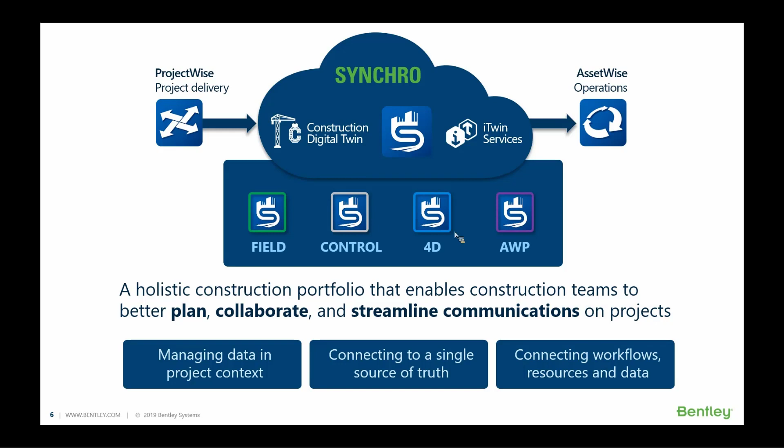Today's purpose is to focus on a specific component of the Synchro suite. That component we're going to be focusing on is Synchro 4D and the Synchro 4D solution as part of the Synchro suite.

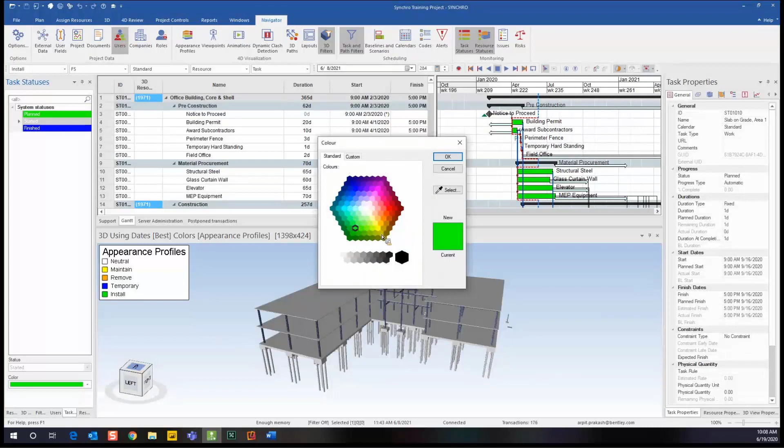As you can see here, we have plan, started, and finished. Looking at the Gantt chart, everything is green. The issue is that planned and start are the same color, so we don't really know which one is which - not a big issue. We can simply click on the one we want to change and update the color. We'll say anything that is started, we'll make yellow. As we can see, that didn't change anything because we have no started tasks - everything's still green, in the plan phase.

So with that said, we can actually create other task statuses if we like. Simply right click in your task status screen, and as you can see, it comes up. Let's call this one, for sake of example, 'issues', and we'll put it as red. Okay, so now we have this new issue status.

You may want to use this if you're doing a review of the schedule. Let's say we see that these steps here have an issue. We can go to our task properties on the right hand side, go to our progress status, and change that to issue. Now we can see our statuses have been updated to issue, and we can continue on. That's just one example.

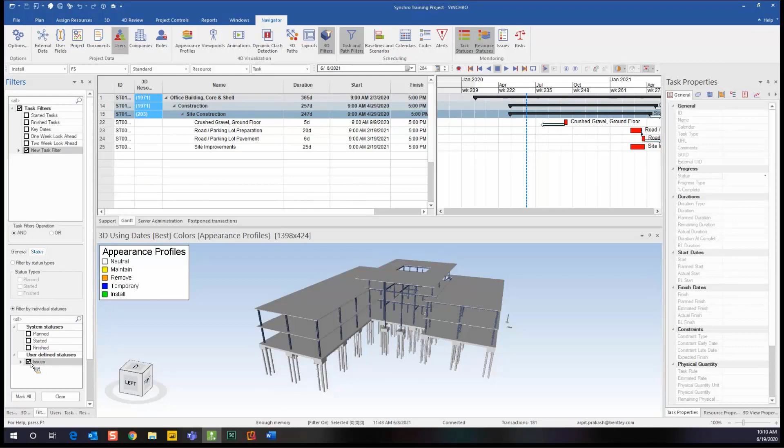We also can use our filters here. If we did a review of the whole schedule and marked everything with issues using our task statuses, we could create a filter, go to status, filter by individual statuses, and say we want to see everything that has an issue. We simply filter it out, and now we can come back to review and correct any issues or errors we need to update. Same goes for plan, start, and finished - right now we don't have any start or finish, so nothing will show up, only the planned. We'll turn this filter off and go back to tasks.

Let's give a couple of these - we got planned, let's change these to started. There we go. Now it gives options similar to P6 - we can choose a date, use our data date, or plan start date. We'll use the plan start date for this, then it's going to ask again for start time. As we can see, we have these started, they're 0% complete now that I have my data date ahead as we go. So now let's say we have those started, let's have these piles here.

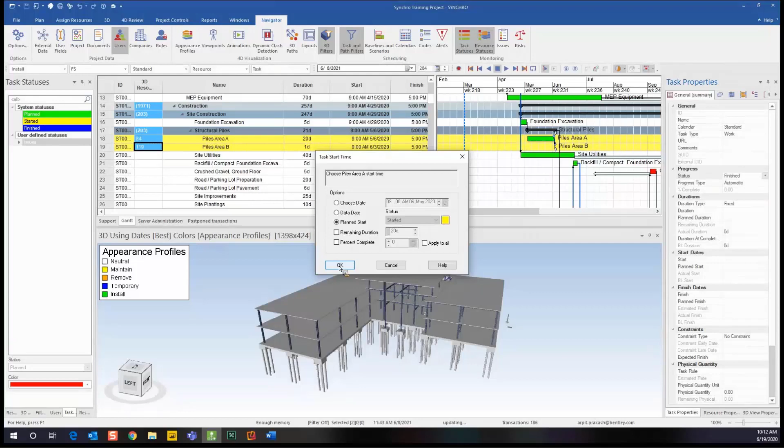Let's say that these tasks have been completed or finished. You simply go here and set it as finished. It's going to ask us to give a plan start date and finish date, and there we go.

As we look at our Gantt chart, visually we can see that these tasks are finished, and as we go up here we have these tasks marked as started. Again, if we wanted to, we could filter out our different tasks using our filters. So I just want to show you the different uses of the task statuses and how we can visually represent them in our schedule here.

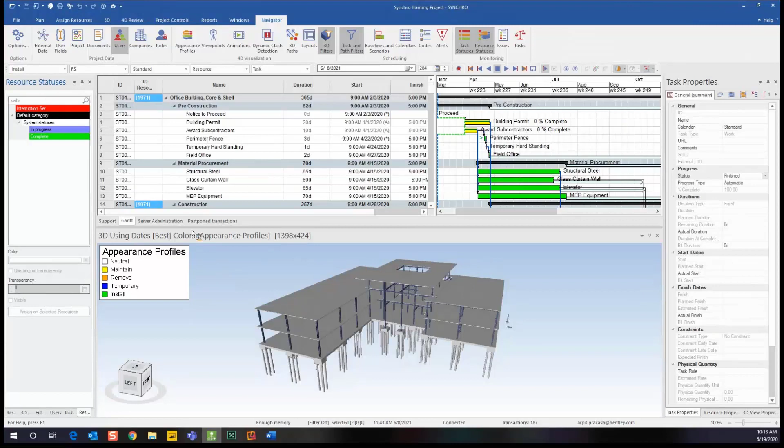So next we'll take a look at our resource statuses. As you can see, here are the system statuses that come with Synchro - in progress and complete. One thing we want to make sure of when using our resource statuses is that our color mode in 3D is set to resource, so now we'll be able to see these colors.

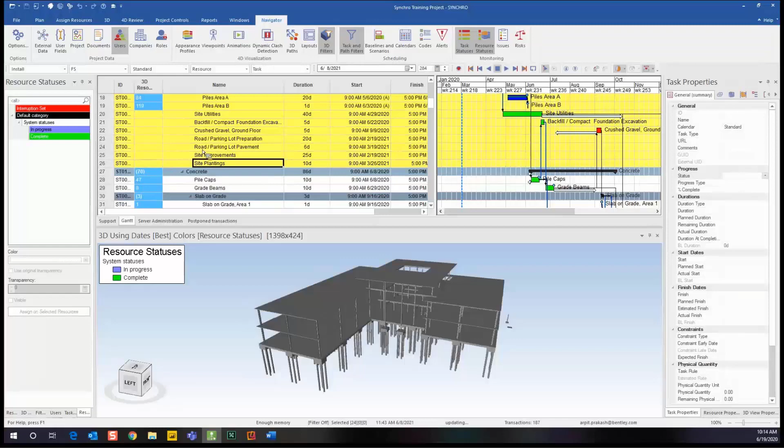So let's say we've updated our schedule and all these tasks have been completed. We'd simply select all the tasks that have been completed, then select assigned resources. Now we can see these are all the resources assigned to these tasks, and we want to show in our 3D view that this is complete.

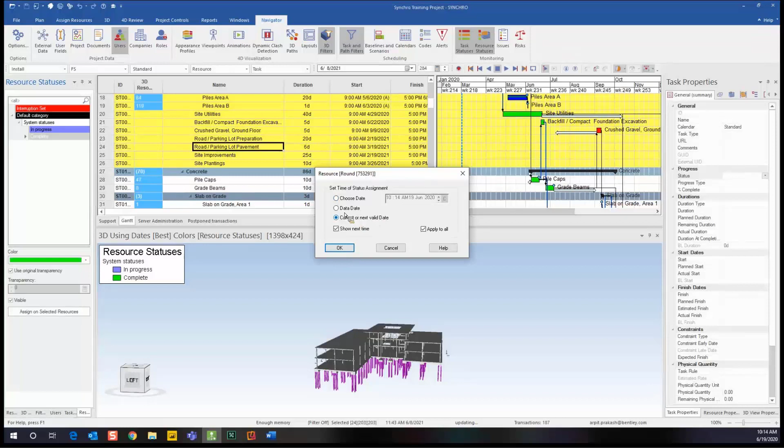So we simply select all the resources assigned to those tasks, and now we're going to assign. Again, we can choose a date for when these were completed, or choose our data date. For this example, we'll just use the current or next valid date. Now we can visually see that everything completed on our model here, all our piles, have been completed.

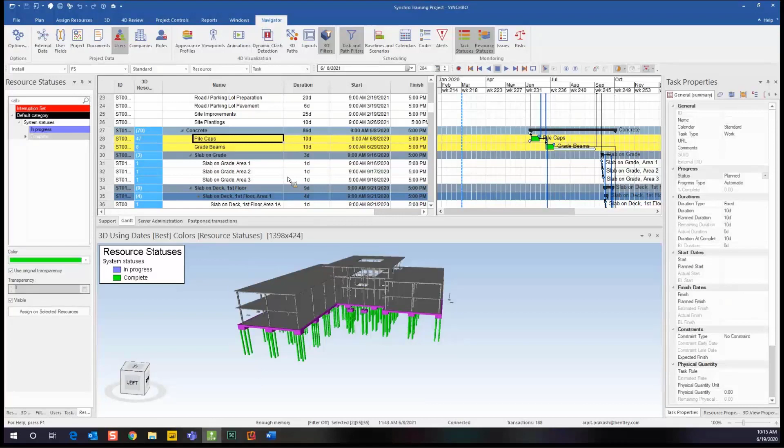Let's do the same here - I'm just going to show a different way of manually updating. So we'll say our pile caps and our grade beams are in progress. Again, we would select assigned resources for those two steps by right-clicking, and at the very top select assign resources. So you can see everything in purple - that's the resources assigned to these two tasks.

So another option we have here is if we click our resource properties and go over to our status summary tab, you can see there's nothing assigned to it yet. So what we want to do is go to the system status we want to assign, right-click, and then select assign status on selected resources. Now you can see these resources have this default category and the status set from system statuses.

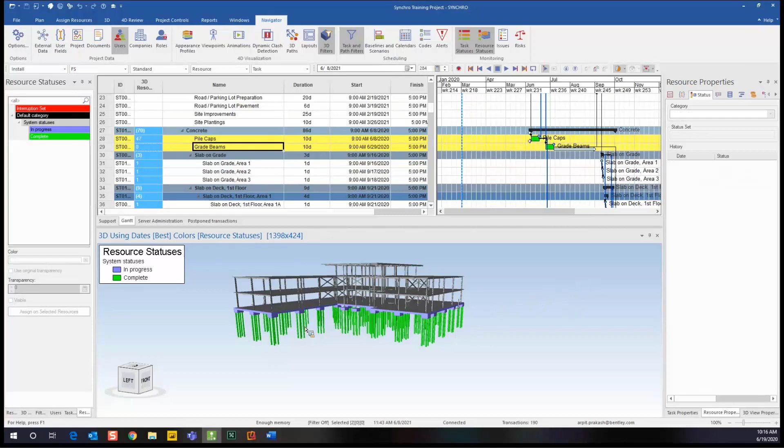So now if we wanted to update that to the in progress status, we'd simply hit add, and it's going to give us the in progress status for these resources. If I hit escape, now we can see that all our pile caps and what was selected for grade beams have this bluish purple color showing they're in progress, while our piles have a green color showing they are complete.

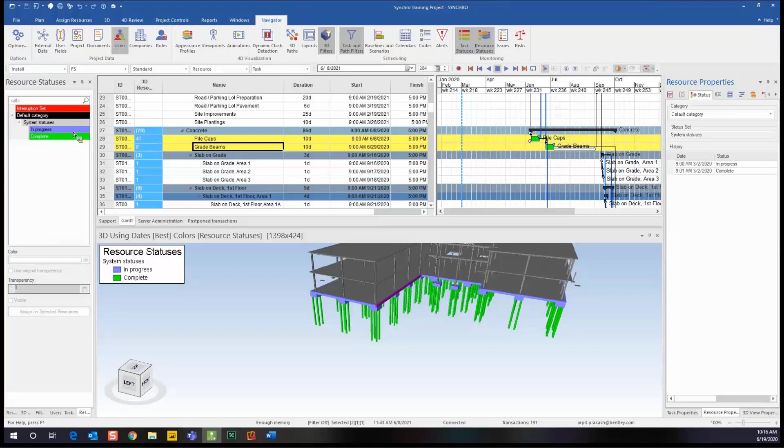So with that said, if I went to add again, it's going to show as complete now. As you add each status, it's going to move to the next status - so if we had four or five statuses, it would go one to the next. If we hit escape, now we can see that status is green, and we can see what's being completed and what is in progress within our model here.

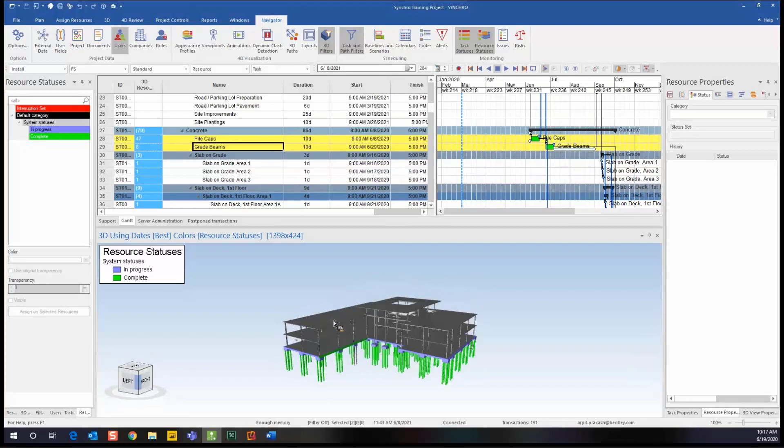So next, like I mentioned, there are a few different ways we can use our resource statuses. The next one we'll look at is using it for a material tracking application, and for that we'll use our steel. I've already created a steel 3D filter, so I'll activate that filter, and now you can see here it's all the steel for our project.

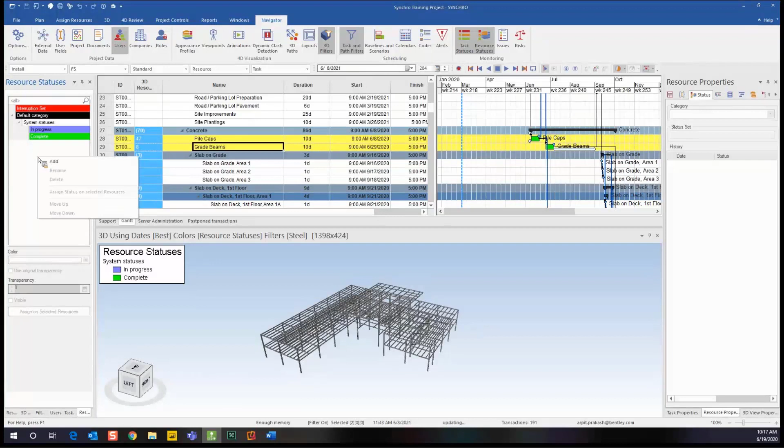So next we're going to want to create some material tracking statuses. Just like the task statuses, with the resource statuses you would right-click in the resource status box there, go add, and we'll just call this procurement.

Now we want to create some statuses for procurement of the steel. We'll select the steel because we want to give it its own statuses, and we'll add them. Let's create a status for anything that's not ordered, one for material that has been released, one for everything that has been shipped, one for everything that has been delivered, and lastly, one for everything that is going to be late.

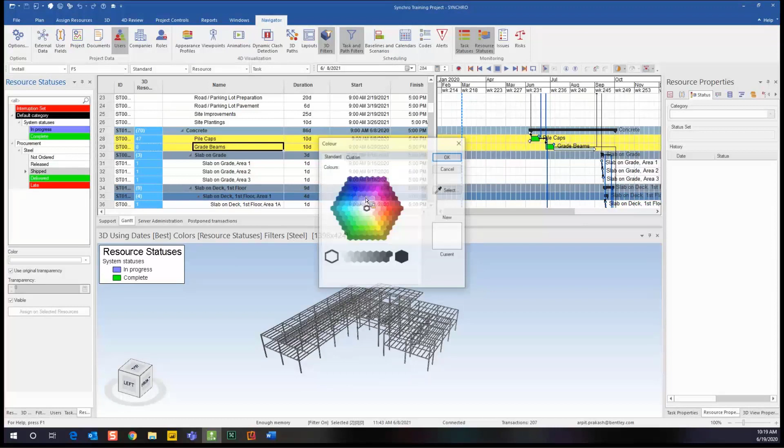So you can see here, all these statuses have no color assigned to them. You would simply click on the status and add a color by going down to the color option. So for late, I think we'll make that red. Delivered, let's give that a green color. Shipped, we'll give it a nice blue color. For released, we'll give that a yellow. And for not ordered, why don't we just give that a black color.

As you can see, we still have our resource status as in progress and complete, right? So now we've created a new procurement resource status, and we want to see the procurement resource status screen.

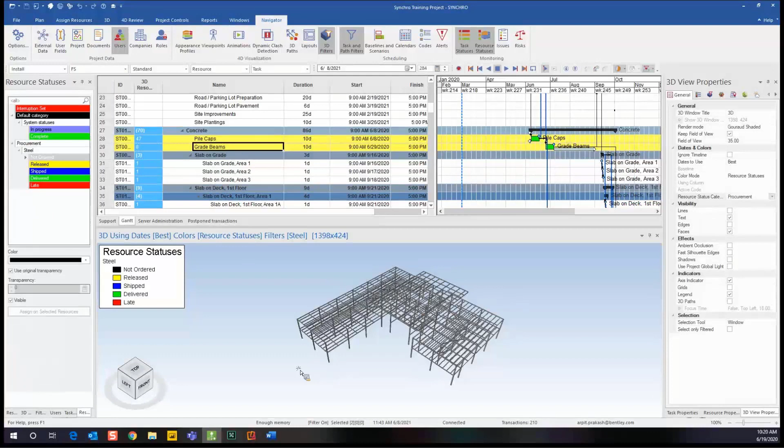So for that, we're going to go to our 3D view properties on the right hand side here. As you can see, our color mode is still resource statuses, but we want to change it to this new procurement that we've created. Once we change it to procurement, now we can see all our different statuses here. That's the nice thing with Synchro, you can create your different resource statuses and have different screens to view the different statuses they're in.

So now we're going to select all our resources here, and let's give everything, to start off, this not ordered status. We go to assign status, and again it's going to want us to tell the date that this status occurred. We'll just use the next available date there.

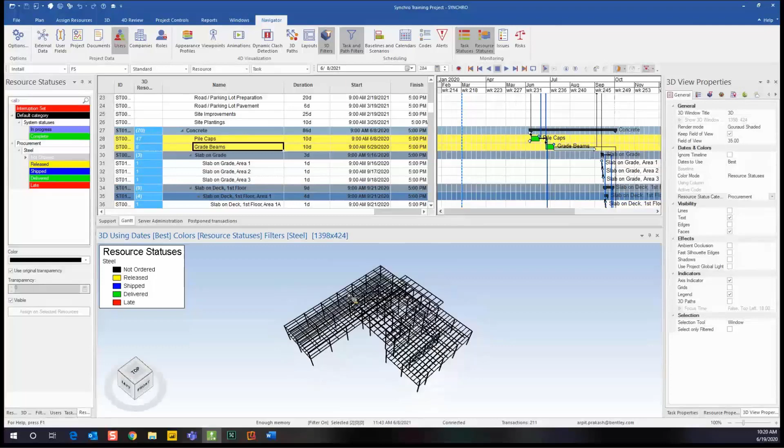So for the sake of example here, let's give this corner over here a status. Let's start with maybe late - we'll assign, again, next selected, so we'll make that red. We'll go over here and give this corner a delivered status, so you can see that.

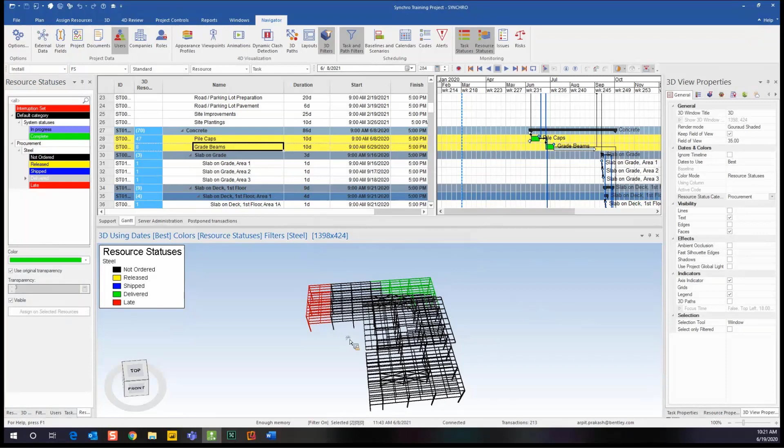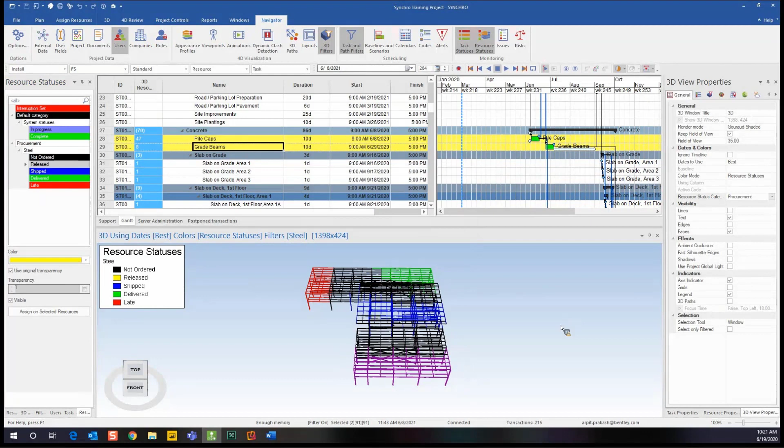Maybe we'll do one right down the middle here and give that a shipped status. And then what do we have left? We have released, right? So let's give this area here a release status. As we can see, it gives us a very nice visual of everything that's being delivered late that we know of, anything that's shipped, released, and then we can see all the materials that haven't been released yet, or haven't been ordered yet, sorry.

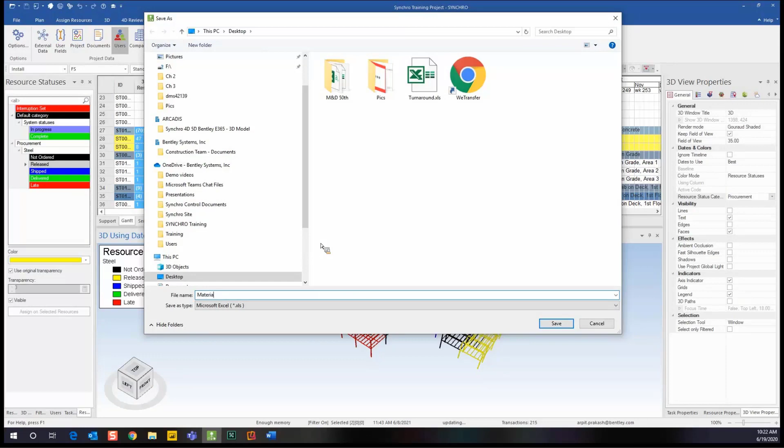So next, we want to take a look at how we can update these statuses using an Excel import or export, and then import back in. To do that, we simply go up to our file and export the data out using Microsoft Excel. We'll just call it materials, save, go next. So we have the option here when exporting the data to pick and choose what fields we want to export.

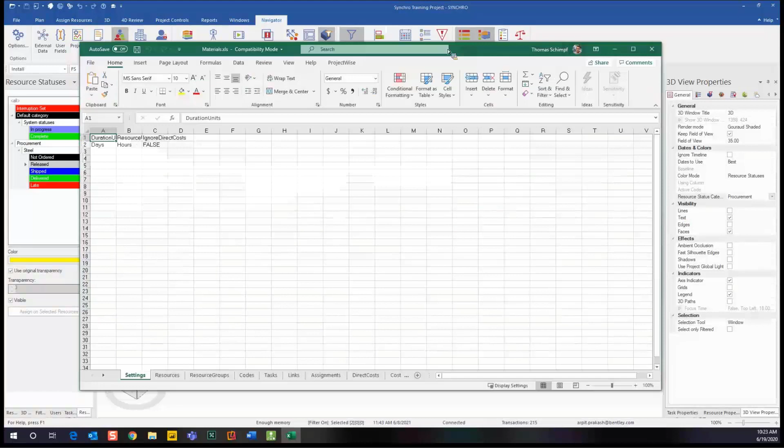For this example, I'm just going to use the default. As you can see here, we have our resources, resource statuses. I'll export everything just so you can see what the export looks like with a fully exported sheet here. We'll hit export, and now it's telling me it's finished. So let me open up this material spreadsheet. Now we can see we did our export, and we have all our different tabs here - settings, resources, resource groups, codes, tasks - whatever information is within Synchro, it's going to export that out to give us the ability to update those fields.

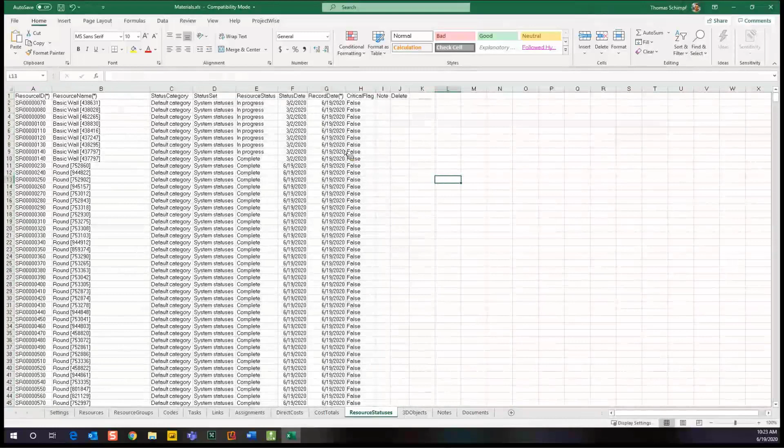So what we want to update today is our resource statuses. I'll just open this up a little bit and put a filter on it as well. So we can see the first status set that we created, the system statuses - we have all those, but right now we're not worried about that. We want to take a look at our steel and update those statuses there. As you can see, we have our procurement and all our steel with resource statuses here, not ordered, shipped. So based off the resource ID, it's letting us know what status is assigned to each.

So with this said, you can set this up with your project. If this is something you want to do, you probably want to set this up at the beginning so that whoever is keeping track of your materials has that common data in your tracking spreadsheets as in Synchro.

So I'm just going to sort this A to Z here. So we have all this stuff that's not ordered, right?

All right, so let's say everything has been released, right? So now we can order everything. So now what I'm going to do is just copy and paste that release status into the not ordered here.

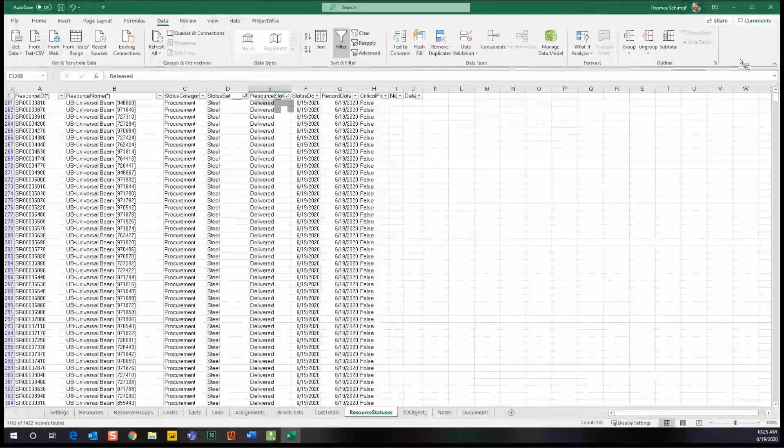So we'll save this. And now we'll come back to Synchro. So now what we want to do is import that information back into Synchro.

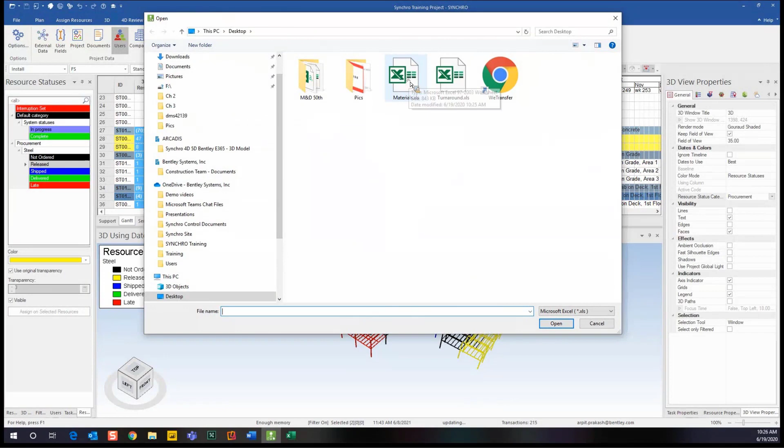So simply, we're going to go to our file, import. We want to import the Excel information. Here we have our materials list, right? Next, it's going to give us our option on what we want to do for each different object here. So we go down our resource statuses, we have integrate, so that's what we want. We'll leave that as that, and just leave it as the default settings for this example.

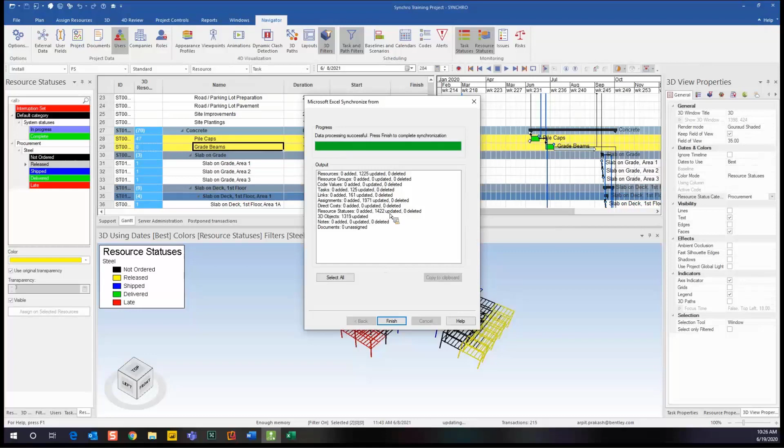So next we'll hit synchronize. Then it's going to give us a little recap of what's been changed. It's showing us our resources. 1,225 have been updated. When we look at our resource statuses, we can see 1,422 have been updated. So we're going to hit finish.

Now we can see everything that was not ordered has been changed to release, and it gives us a very nice visual of our materials. We can visually see what's going to be late, released, shipped, delivered, and it gives us a very nice visual of that within our 3D window here.

So next, we chatted about earlier is about creating some weighted statuses, and that's where we can create a status, assign it a percentage for completion, and that will reflect within our schedule, right? So again, to create a new status, we're just going to hit add.

We'll call this weighted status. It's going to bring it down to the bottom for us here. So now we want to add again.

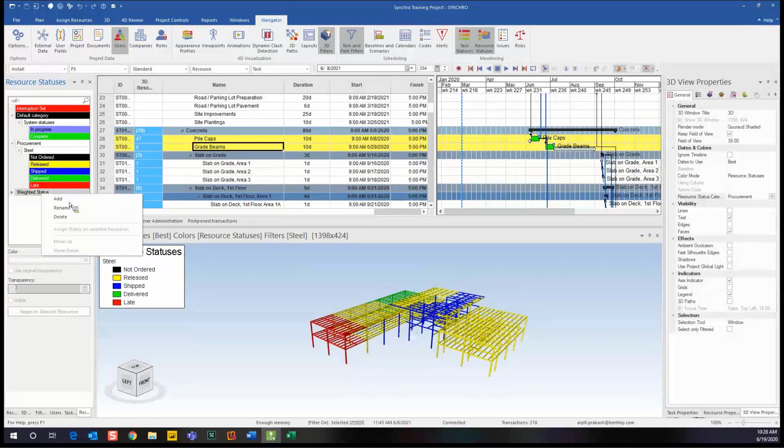For this, I want to do this with our concrete. So now I'm going to clear all my filters so that I can see everything. So now we can see, so now I just want my concrete, right? So if I scroll down, we can see here, we have all our concrete steps here.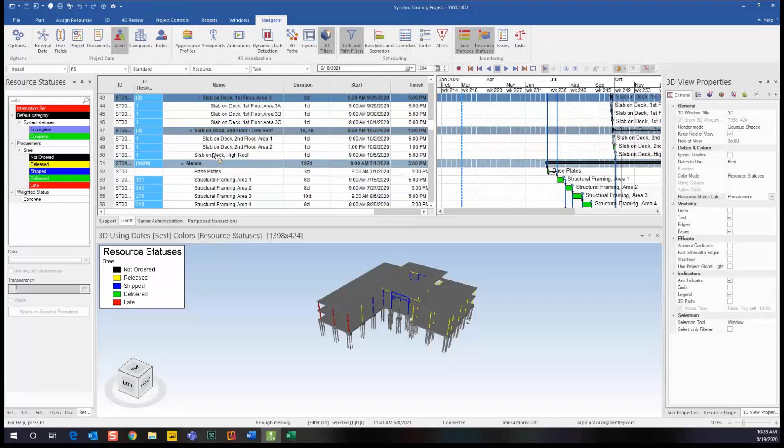So to get all my concrete resources, I'm just going to scroll to the bottom of our concrete steps, highlight all my steps here, right click, select assigned resources. Now we can see it has all my concrete resources selected.

Now I want to create a 3D filter, right? So to do that, I'm simply going to right click on the screen. I'm going to go up to filters, and then I'm just going to say create filter from selected. So now I'm going to call this concrete.

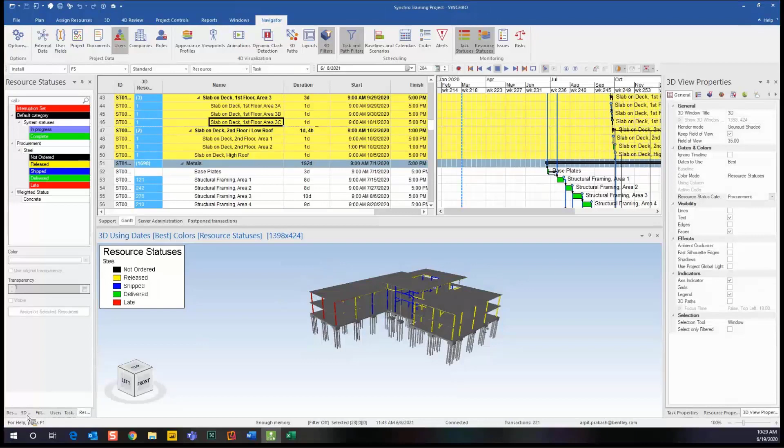So now as you can see, we go to our 3D filters, we have our concrete filter. So now I'm going to activate that in our 3D view. And now it's isolated just our concrete for this project, right?

So now let's go back to our resource statuses. So we have our concrete. So let's create a few different statuses for our concrete here. Let's say our first status we want is formed. And our next, we will create a reinforced. And then lastly, we'll add and we'll just say, let's call it poured.

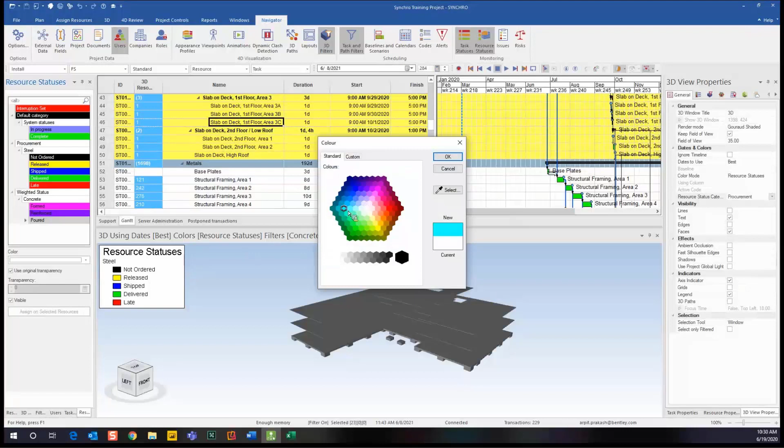So again, it's going to just default to having our statuses as a clear white status, your original color. So for the formed, let's give this a color, a bright pink here. And then for our reinforced, let's give it a different color we haven't used yet, maybe this purple. And then for our poured, we'll give it another color, let's try this blue. So now we can see here that we have our 3 different statuses with 3 different colors.

So again, what we want to see is the weighted statuses concrete resource status, right? If we look at the screen here, we're on resource statuses and we have it on procurement, right? So now we want to change that to the weighted status, right?

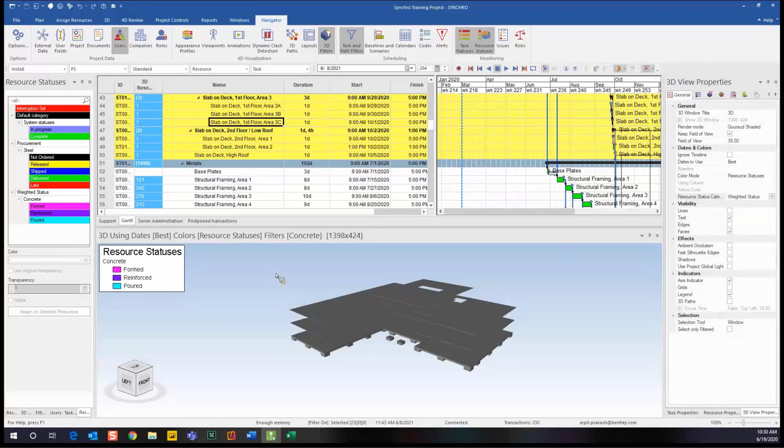So we haven't assigned anything, so obviously we're not going to see any of these colors. Before we do start assigning anything, we're going to jump over to our Project Controls tab here at the top, and then we want to go to Recalculate Task Progress.

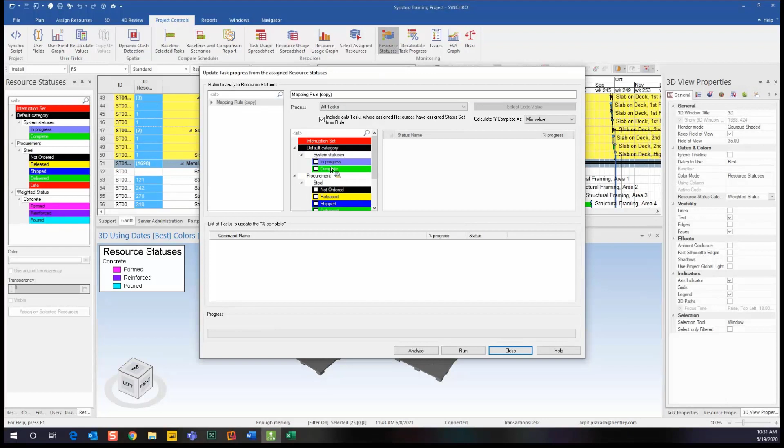From here, we want to create a new rule, so we're going to go into our rules to analyze resource statuses. We're going to hit Add, and it's going to give us all our resource statuses that we've created. We'll click off our three different concrete statuses here, and it's going to bring them up into our window. As you can see, we have formed, reinforced, and poured, and our progress percentage for each is 0.

So let's say for formed, if we assign a formed status, it'll give us a percentage complete within our task of 20%. For reinforced, let's say we want that as 60%. And as soon as it's poured, we'll give that 100%.

So now we have that complete, and we can close this out.

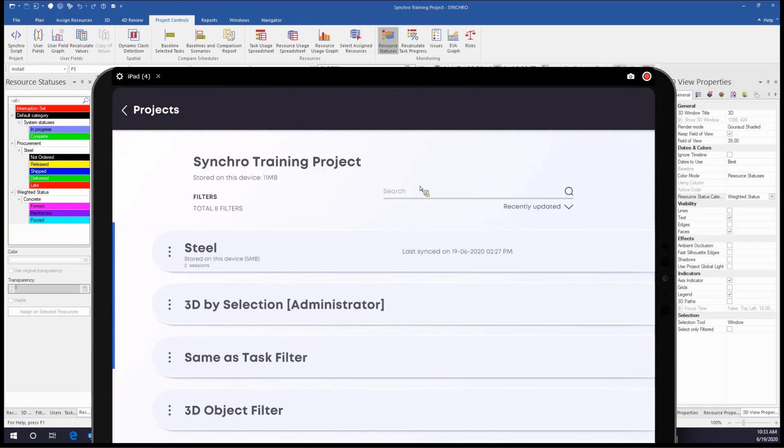So as we scroll down, we're going to have to pick our project here. As you can see, if we look at the top, it's our Synchro training project, so we're going to pick that. Once we open that, it's going to list all the 3D filters that we have. For this, we created our filter for concrete, so I'm going to hit concrete.

And now it's going to bring up all our concrete, and I can simply move the concrete around to the different view that I want to see.

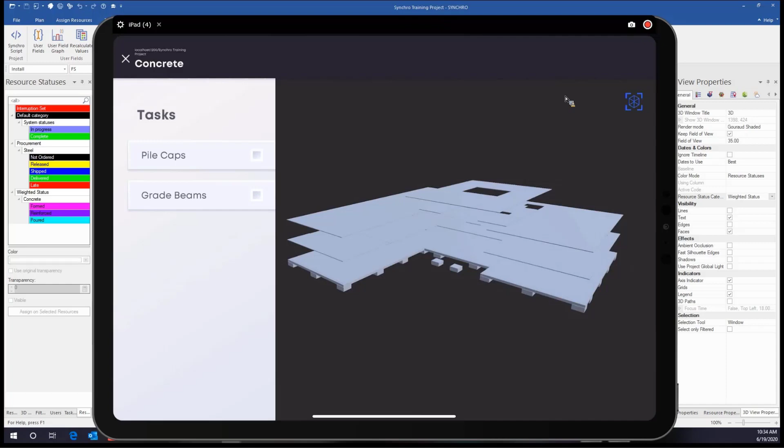One thing I forgot to do before I logged in is that we want to select all our resources here, and then we want to assign the concrete. So we're going to select all our resources, right-click on the concrete, and then assign the status on the selected resources.

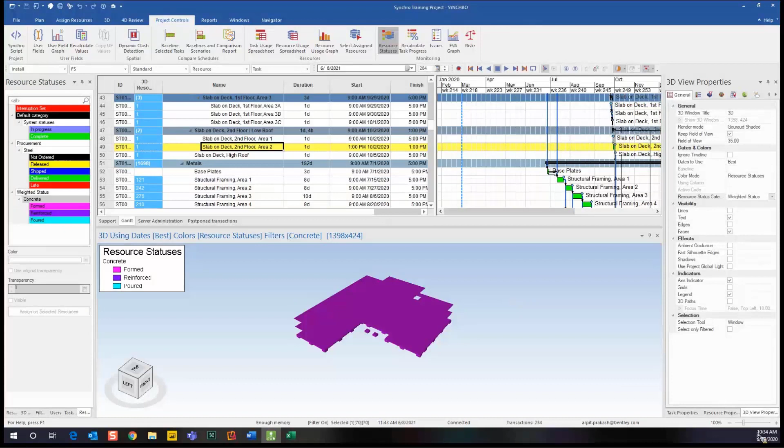So now if we go here, just to double check that we have it — now we can see under our Resource Properties and Status, we have our weighted status for concrete.

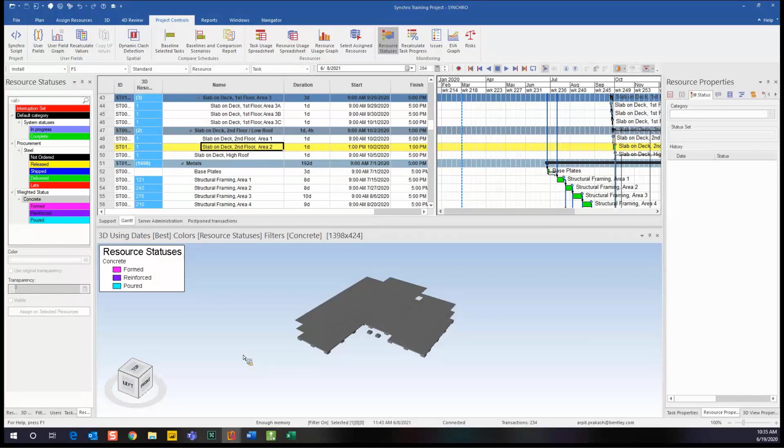So now if I jump back into the site here, jump back into site, go into our training project, go down to concrete. Now we're going to see all our concrete.

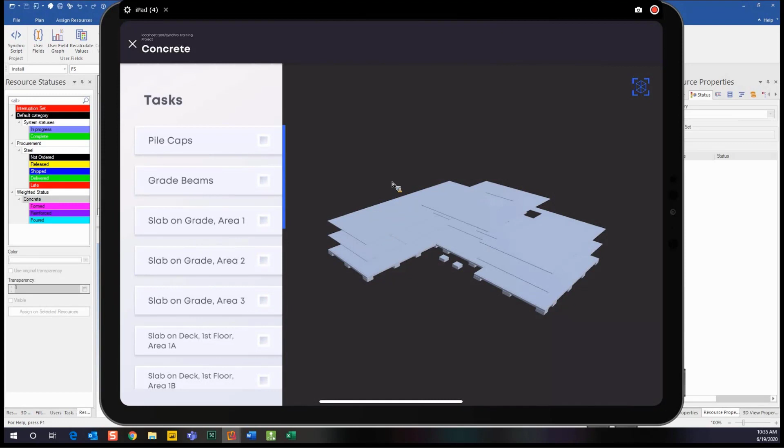All right, so let's start with our pile caps here. As you can see, it shows all our pile caps. It's actually showing us our system status because we do have a system status assigned to these pile caps. So if we wanted, we could actually update our system status from the site as well. Whatever status is assigned to these resources, it's going to show up on the Synchro Site app.

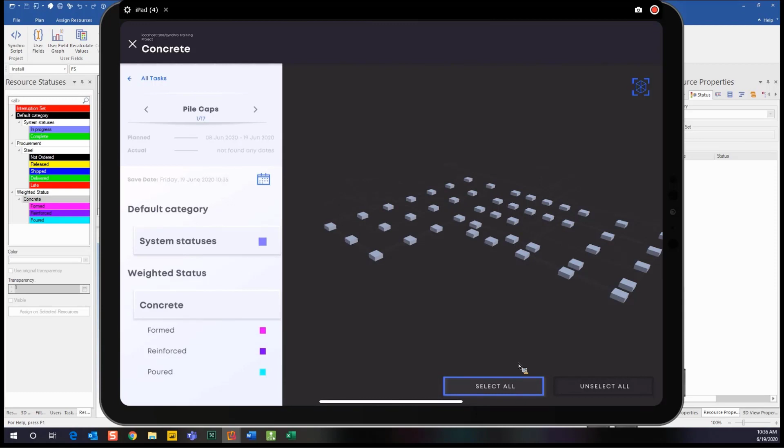But for today, we're going to take a look at our concrete. So for all our pile caps, I'm going to select all here. So now everything's selected, and I'm going to say that everything has been poured. So now we've updated that.

Let's go down to our grade beams. I'm going to select all, and we're going to say those are poured. I'll save that as well, and I can simply hit this Next button to go to the next resource. We can see I'm at 3 of 17.

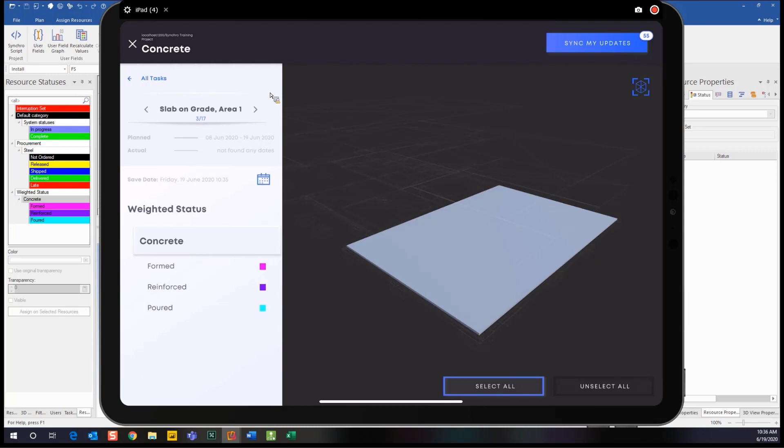So for this slab on grade, let's say all our slab on grade is poured. I'm going to hit Next. I can simply click on the screen here, click on the resource that I want, hit poured, saved. Let's go to our next one, saved. And then it's going to bring us to our first floor.

So let's say our first floor, everything on our first floor is reinforced. So again, I'm simply clicking Next, clicking on the actual resource, then clicking on the status I want to give it, hitting Save, onto the next.

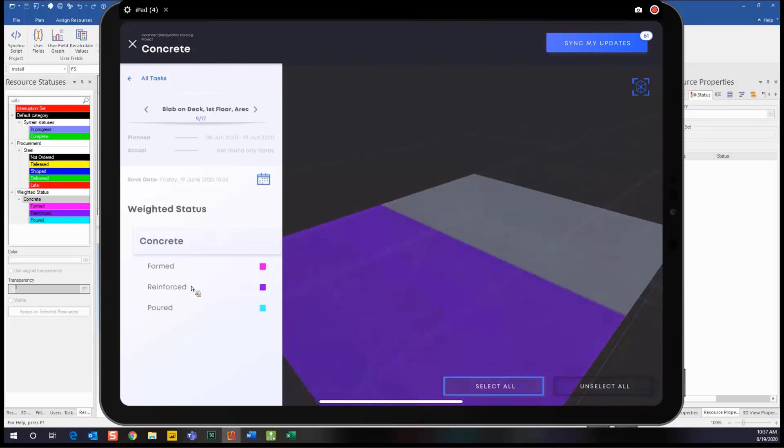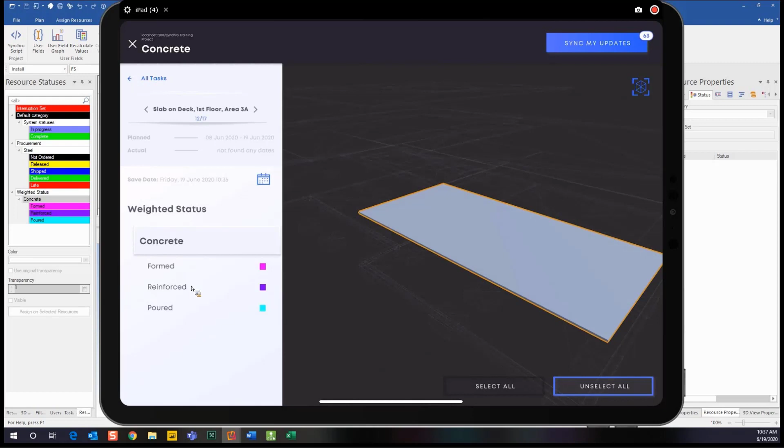So let's give that reinforced, saved. One more here. And now it's bringing us to our second floor. So we'll say for our second floor, let's make everything formed. We'll go to next, again select on the resource, formed. And we can go through and it's going to bring us to each task and to the resources assigned to that task, and we have the ability to assign these resources.

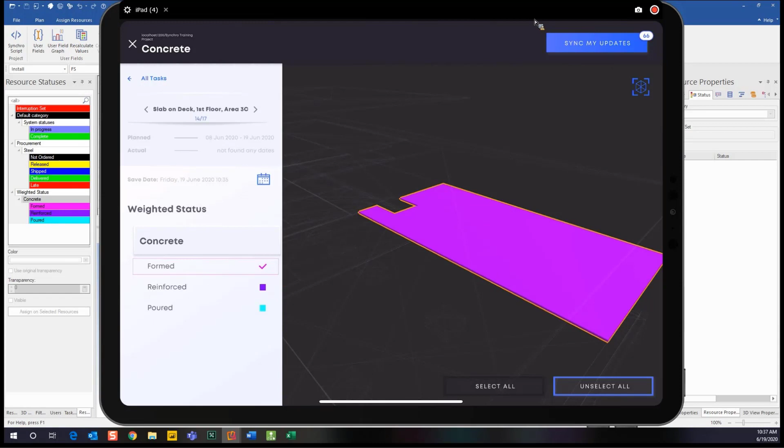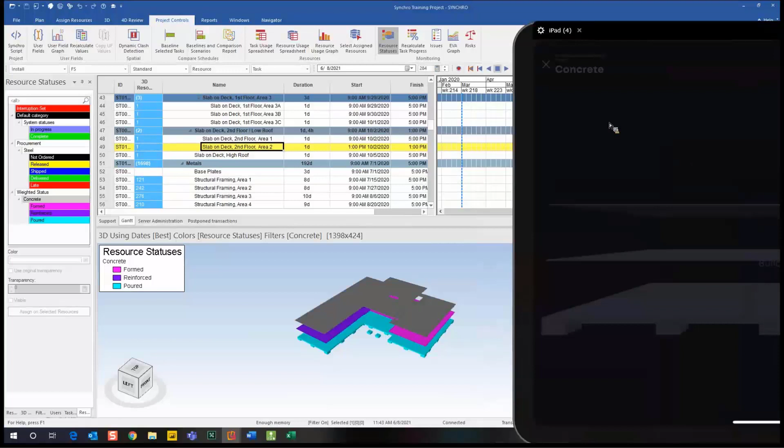I'll do one more, and I think that should be good for demonstration purposes. All right, so now that we have all these selected, you can see up at the top here it's showing that I have a bunch of updates that I need to sync. So I just want to, I'll hit sync my updates here. I'm going to hit sync again.

And now we can see here it's updating. Our Synchro has now been updated with these task colors. So now we can see everything that has been poured, everything that's in the reinforced stage, and then everything that has been assigned the form. So now if we take a look at our tasks here, let me just scroll up a bit. We don't have the status updates for that to happen. Now we can analyze and it'll show us.

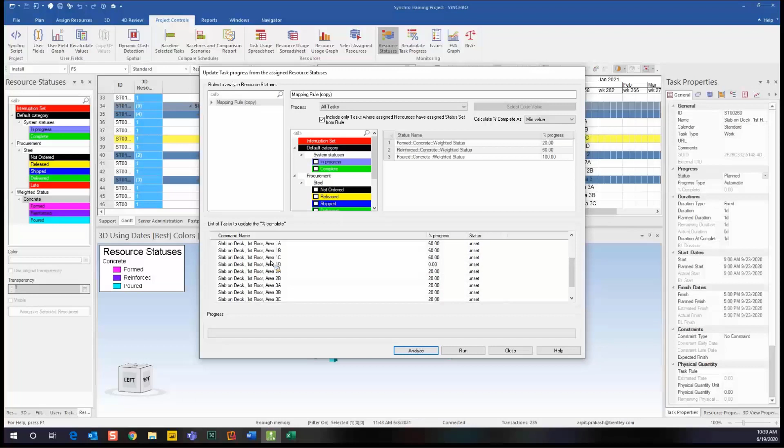From what we just updated in the site app, we can see here that the pile caps are now at 100%. As we scroll down, it's going to show us our different tasks here and the percentages that we assigned in our app. Do a quick check to make sure everything looks good. As you can see here, it says unset, so all we want to do is hit run, close.

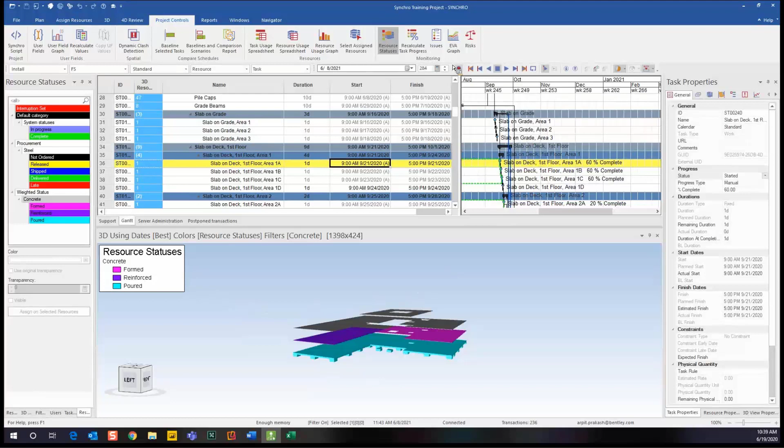And now within our schedule, we have our schedule progress based off of the statuses that we gave it. As we can see here, our slab on deck is at 60% because it has that reinforced status. So that weight that we gave it within our rule here is a 20, 60, and 100, and it's reflecting within our schedule to show that it has 60, 20, all that.

And then if I scroll this open a bit, when we looked at the very beginning of the demo, we have our task statuses as planned, started, and finished. So all these steps that we said have been poured are 100%. You can see it gives us that blue color in our Gantt chart to show us that these are complete. As we scroll down, anything that has started is yellow, and then anything that hasn't been started is going to show us as in the plan state, because we haven't updated anything there. The work hasn't progressed on those.

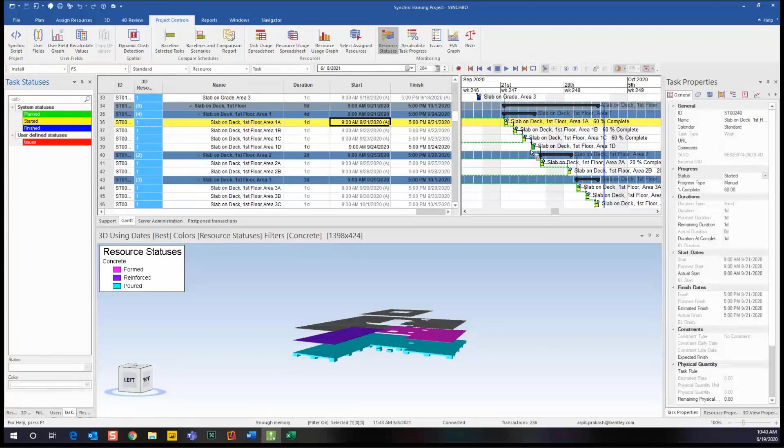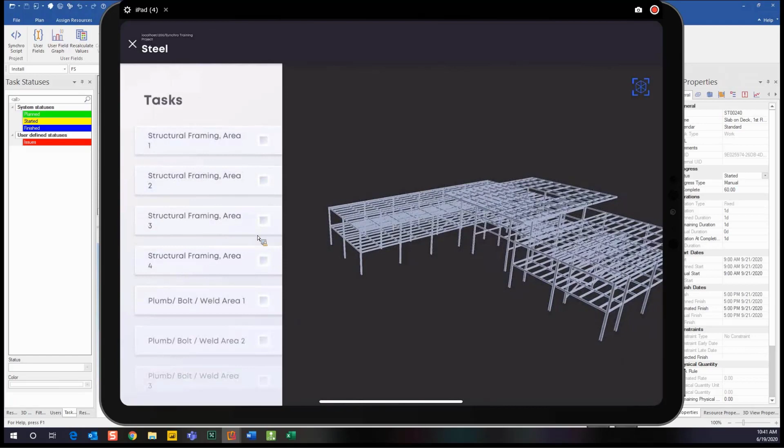So I just want to show here again, we created our material statuses for the steel. As you can see here, we have our steel 3D filter here, so I'm going to click on that. Now it gives us our 3D model. So let's click on our first step here. It shows that we have a whole bunch of materials. We have some stuff that's in release, some in shipped, and some that has been delivered.

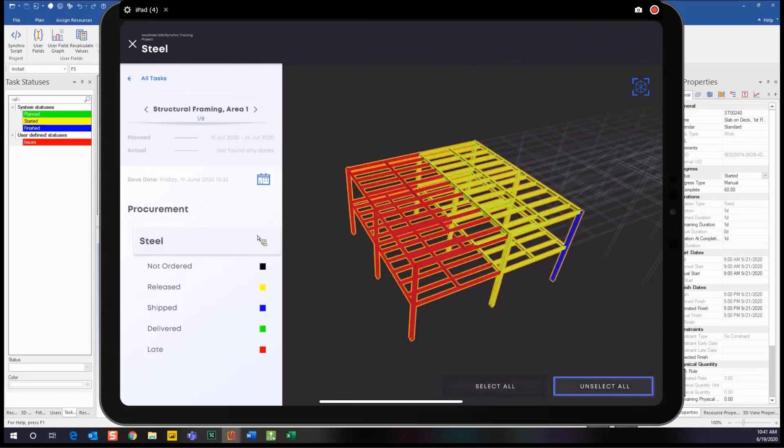Let's say that everything for this task, everything's been delivered. I'm simply going to click on delivered, hit save.

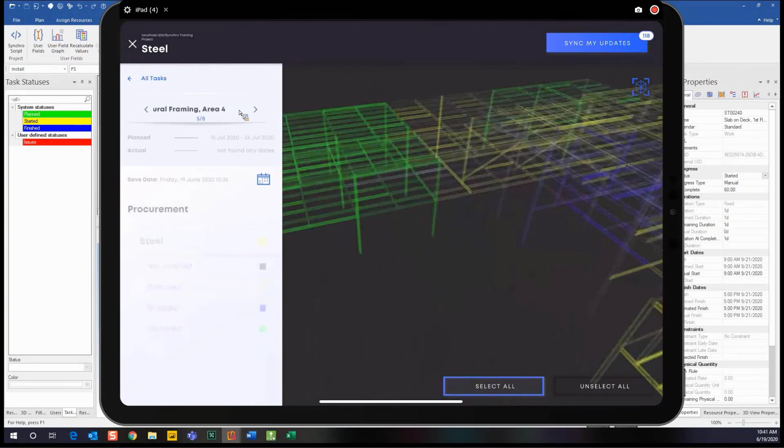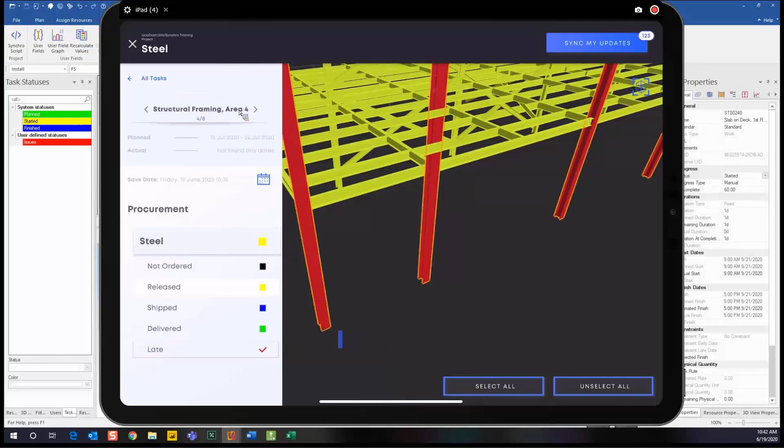Now let's move over to this one here. And let's say for this task, all these upright beams here, they're going to be late. So we can simply just zoom in and I can select the individual beams or elements, resources here that I want to select. And I'm going to say, you know what, we just found out that the truck carrying these crashed, it's not going to make it. So now let's set that, as we can see there.

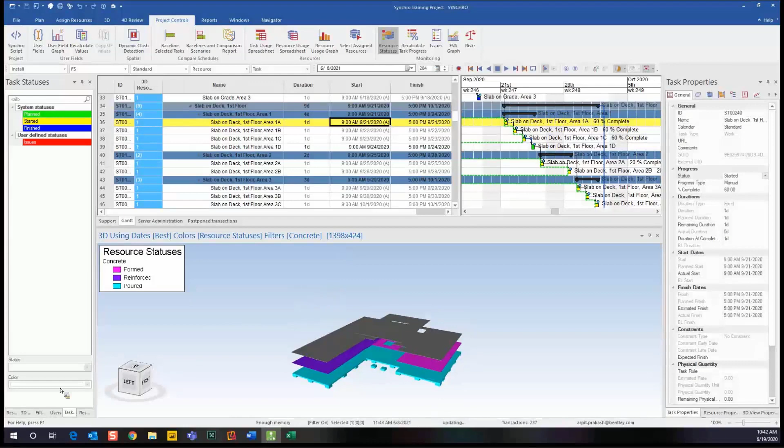So now let's sync our updates, gonna sync one more time. Now within the site app, it's gonna load. If we go back here and we switch over to our 3D filters, I'm gonna deactivate. Now all I wanna see is my steel. Again, we're not seeing any color because this is for our concrete resource that we set up. So we want to go to our 3D view.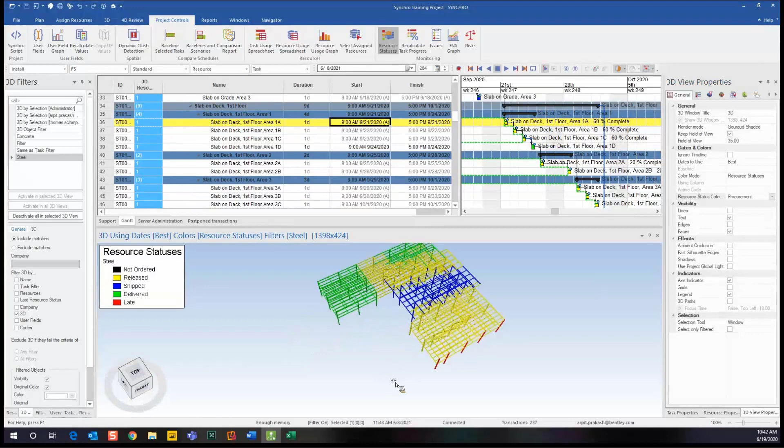And now we want to see procurement, right? So like we did in the site app, we said for this task here, everything has been delivered, we're good to go. Unfortunately these uprights here, they're all going to be late, right? And we updated that within our Synchro app there.

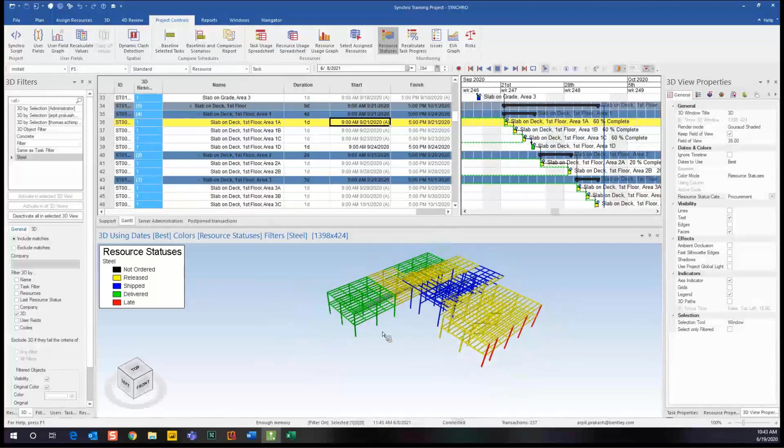So these are just some basic ways that you can update your statuses, and kind of how your task statuses can interact with your resource statuses, right?

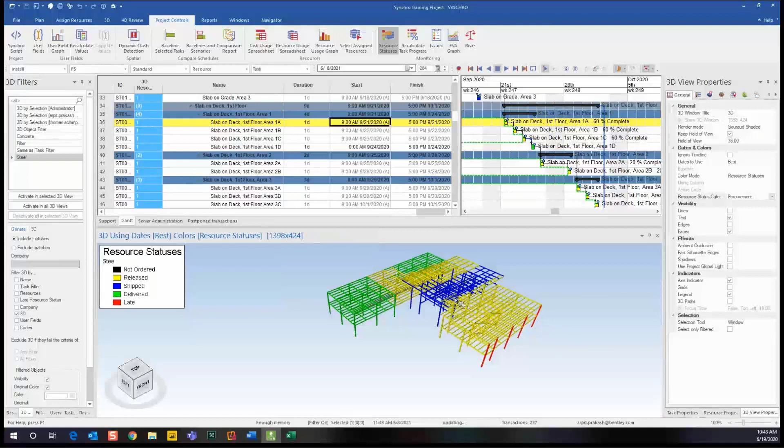So let's filters, I just want to show all. So now we can see, right? I show all within our resource status. We can see all our materials that we set up for the steel. We can see everything that is going to be shipped, delivered. We can simply go to our weighted statuses, right?

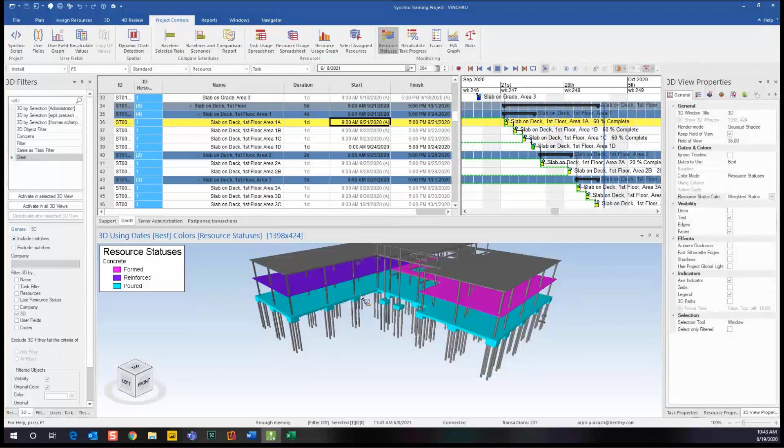If we had set that up for the whole project, we only set it up for our concrete, but we can see our weighted statuses. We can see everything formed, reinforced, poured. When we assign that, right, it gave us an update to our task, right? We can see 60%, 20%. It updated the progress of our tasks.

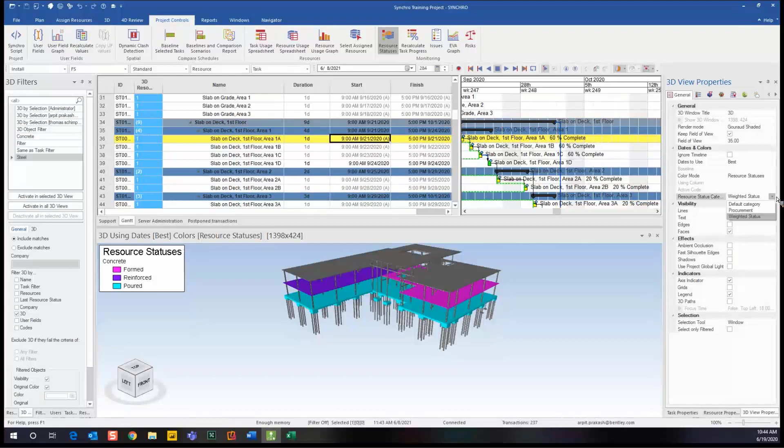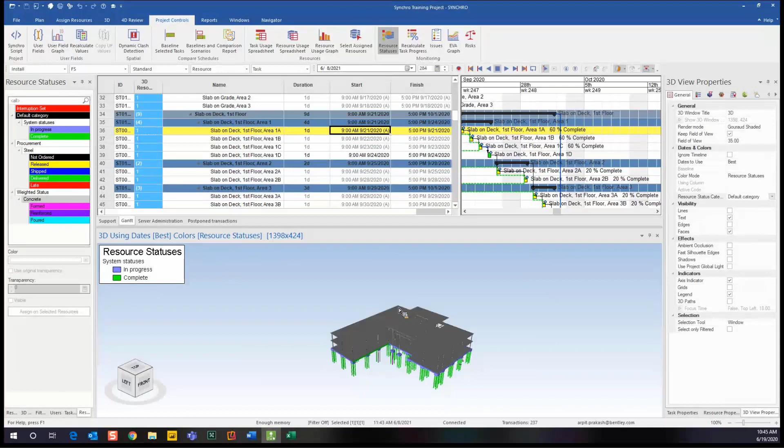And then our first example here is we had our default category, which is just basically your standard resource statuses that are set up initially with Synchro, and that shows us everything in progress, everything complete. So that's basically your resource and task statuses in a nutshell here.

As you have your different, there's a ton of different ways that we can set these up. Today I just used basically our basic system status that comes with Synchro. We used it for kind of a procurement method, and then basically for our schedule updates using this weighted method, right?

I guess if we don't have any questions, Brian, Arpit, is there anything you wanted to add? No, I think that's really good. Thanks for everyone who's been able to attend today.

Maybe while you've got your screen up, just show everyone what you can grab for additional resources while you're in Synchro Pro, under the help bar on the right. Within there are some training materials that come with the Synchro installation. There are links to the Synchro manual, and also access to the Synchro Training Academy, which is online self-directed training, and always a phenomenal resource, and always glad to make that available to all of our Synchro users across the globe.

Yeah, it's a good point, that within Synchro you have these quick links. We do have our Synchro Academy. Actually, this model here is part of a model from one of our training exercises here. It's one of the buildings that we use for our fundamentals training. But as you can see, we have everything kind of listed within your help.

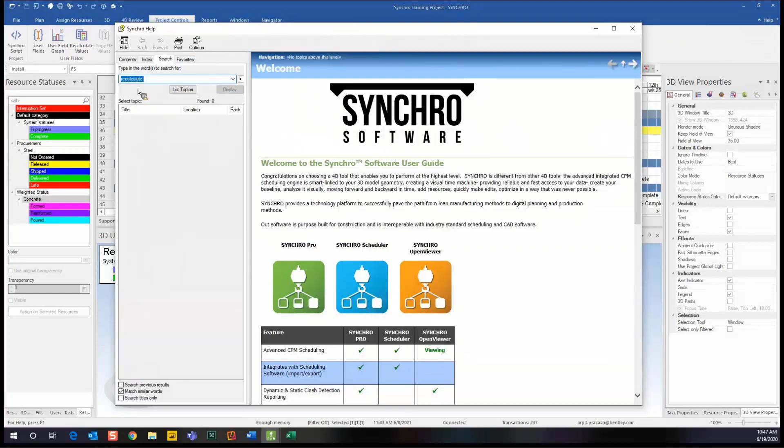If you're ever stumped and you need some help, this search is a very good resource. I still use it quite a bit. Your search, basically just type in what you're looking for, like recalculate. So if you wanted to go back and set up some recalculate task progress, here we go, you type it in. It's going to give you

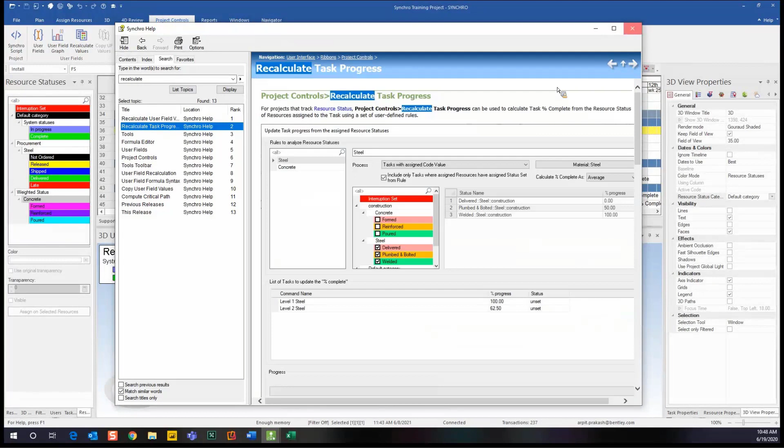some nice screenshots, and there's actually how-to videos for some subjects as well, but you're going to have that there. So you can find that in your help. You have your Synchro homepage, your Synchro Academy. And if we go to our support here as well, you're going to find all that help here too, right? So you have your homepage, customer support, Synchro Academy, Synchro training.

You have your equipment library here, so if you wanted to import some animations, there's already a whole bunch of equipment populated in that library, cranes, backhoes, that sort of thing, right? And then for our plugins, you have your different plugins here, your Revit and different things like that, right? And then check the web for a newer version of Synchro. And then we have our different help avenues here, so.

No, it's good. I'd like to thank everyone again for attending, and thanks a lot, Thomas, for this. This was really good. All right, thank you.